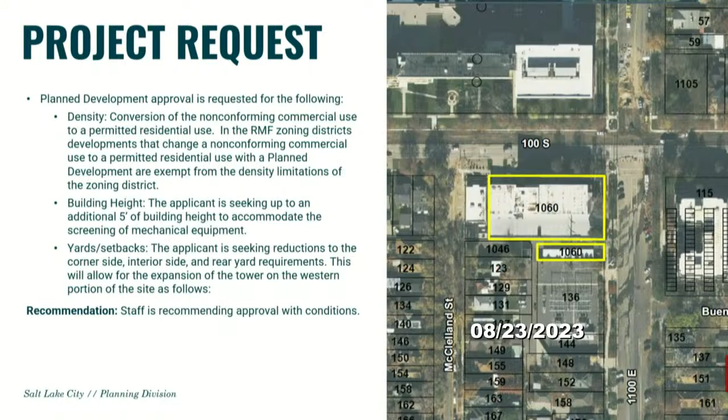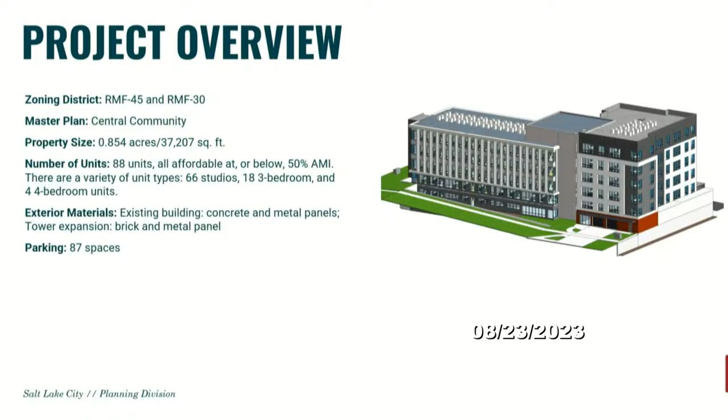The project overview: the property zone is split between the RMF45 and RMF30 zones. It's in the Central Community area, about 0.854 of an acre. There are 88 units, all affordable at or below 50% AMI, with a different variety of unit types - 66 studios, 18 3-bedrooms, and 4 4-bedroom units. The exterior materials for the existing building are concrete and metal panels. The tower expansion would be brick and metal panel, and they're providing 87 parking stalls, which exceeds the minimum required parking.

We'll be looking at the zoning ordinance standards review, so RMF45 zoning, and then the plan development standards. If we look at the existing conditions, you can see on the top left and right the existing medical building. The one on the left gives you a better image of where you'll see the newer portion, because the newer portion of the building is going to be on top of that 2-story and would match the height of the existing tower to the west.

Here's a view from the alley on the east, which will not be impacted through this process - it will continue to exist and be passable. The left picture also gives a good idea when we talk about setbacks, because you can see this parking garage is actually set back like 3.3 inches from the property line, so there's basically no setback currently.

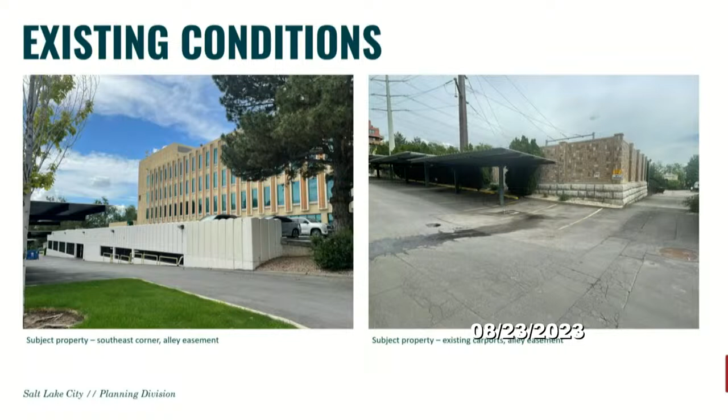These are the existing conditions - this is just a general survey, showing the parking areas and the building itself.

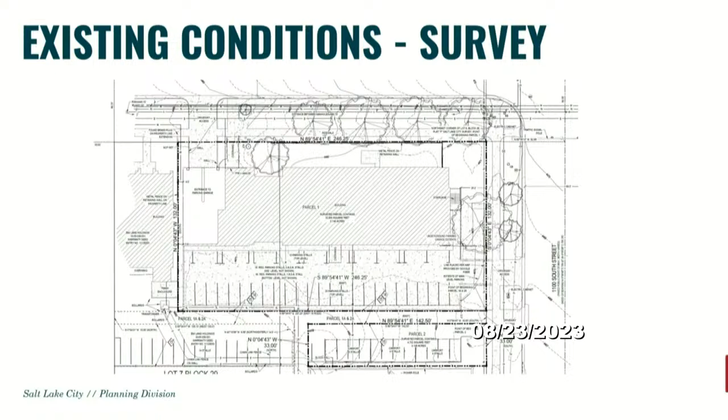If we look at the proposed site plan, you can see the outline in blue is where the new development would be, but only on the western half would you actually see new construction. The rest would just be remodeling and reusing that existing medical office building. Some of the parking structure's top will actually be used for amenity space, with a portion of that residential tower going above as well. The below parking will remain to provide parking for the development.

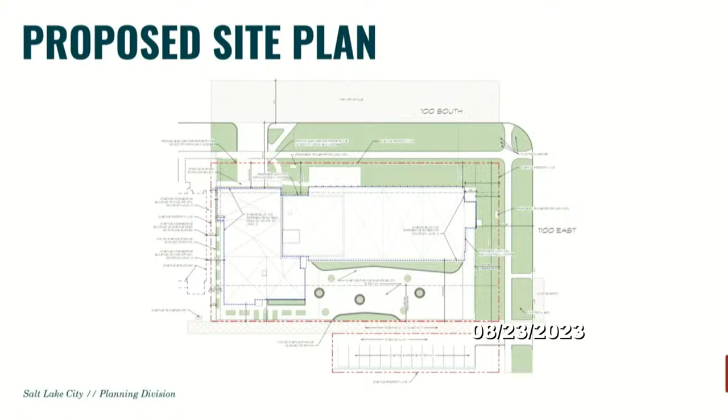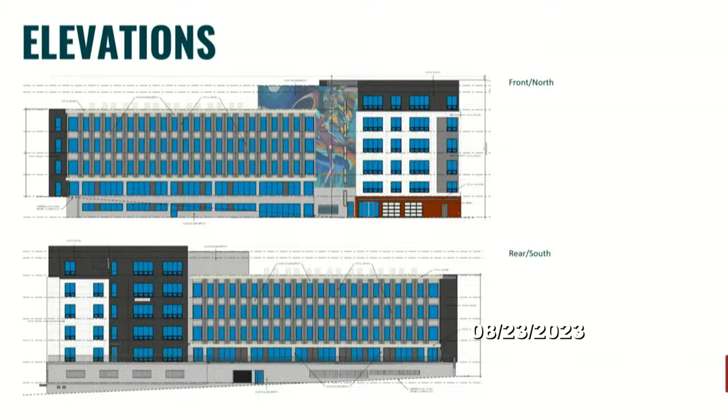I'm going to go through the elevations rather quickly because the applicants are here, and I'll rely on them to talk more about their design. The top one would be the north elevation, fronting on First South. The bottom should show the southern elevation. This shows the two sides, with the east portion being the street-facing side.

So let's go into the modifications, and why we're here tonight.

The Planned Development approval is requested for the following. The first one is density - what we have here is the conversion of a non-conforming commercial use to a permitted residential use. In the RMF zoning district, developments that change a non-conforming commercial use to a permitted residential use are allowed through Planned Development, and by doing that, they become exempt from the density limitations. I'll talk a little more about what would be allowed under RMF soon.

The building height is seeking up to an additional 5 feet of building height, just to accommodate the screening of mechanical equipment. Then yards and setbacks - the applicant is seeking reductions to corner side, interior side, and rear yard requirements. What you'll find is that because this building is all within the actual footprint of the existing building, it doesn't meet them already, and so the newer portions aren't going to meet them either. So again, they recommend approval with conditions.

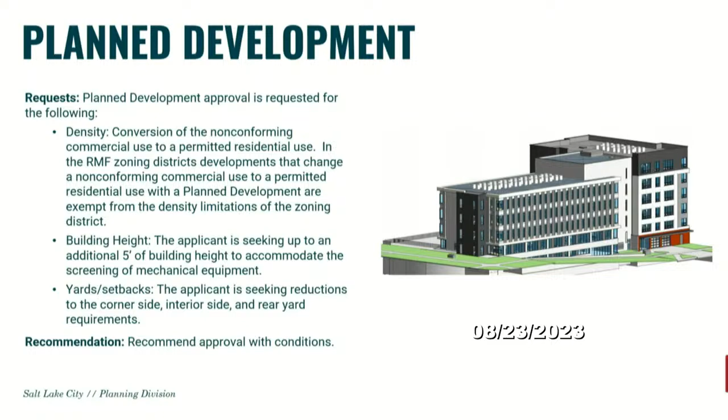Looking at the density, as of right now, because we're looking to propose to convert to residential use, there's 88 units of varying different sizes. 100% of them will be for residents with rents between 25 and 50% AMI, and 10 studio units will actually be affordable at 25% AMI, which, as we've been discussing affordable housing a lot, is pretty difficult to achieve and pretty rare to see.

If this is to remain as RMF 45, if we look at the qualifying provisions for multifamily in this zone, you could have a total of 35 units.

So here we're looking at building height. This is a non-conforming building. It wasn't always on RMF 45, but it was in the 90s, and that made this not complying at over 45 feet. But we can expand as long as we don't go above that height, and that's the green line at the top of the building, showing the max building height was at 69 feet, 7 inches. As we go across there, you can see that is the rooftop height.

The applicants are requesting an additional 5 feet, which is allowed through the Planned Development process. Again, that would be just for a parapet wall to help screen some mechanical equipment. You can also see that because of the grade, the height does vary from 46.5 feet on one side to about 69 feet, 7 inches on the other.

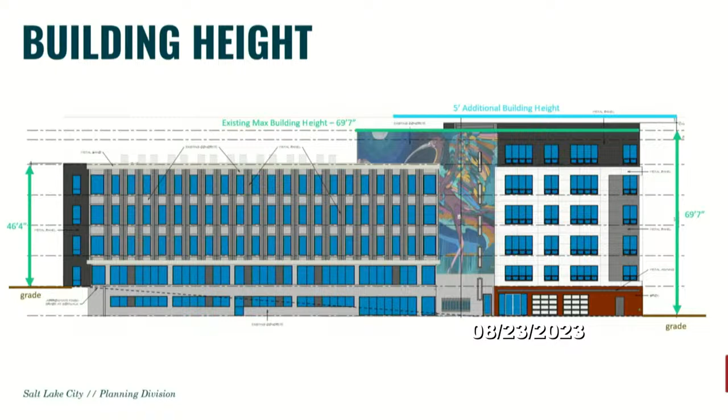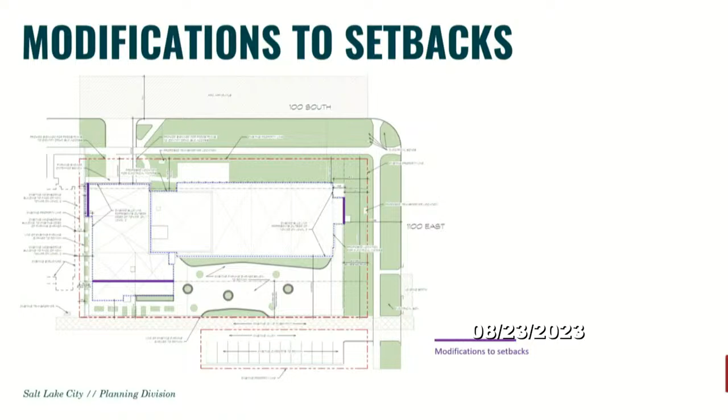If we look at just adopted master plans, staff feels that it is in compliance with adopted master plans, with Plan Salt Lake, Central Community Plan, and Housing SLC. It's providing affordable housing in an area of the city where there are fewer income and rent-restricted units. We're providing studio as well as family-sized units, removing a non-conforming land use, and also meeting Housing SLC metrics, which is seeking to provide affordable and deeply affordable units.

The public process: we sent early notification to property owners within 300 feet. It was posted online in an open house. The Central Community Council discussed the project and provided a letter of support with considerations, which should be in the staff report. Staff has received a number of email comments, and those are included with the staff report, or they were put in your Dropbox for those that came in this afternoon.

Those that commented expressed concern about alley access easement, adequacy of parking, the proposed design, and impact of affordable units. Two expressed support.

So again, our recommendation is for approval. We have 2 conditions that are limited: first, final approval plans shall be delegated to planning staff to ensure compliance with zoning standards and conditions of approval, including off-street loading, signage, lighting, and landscaping. Second, that this is an approval for the specific items discussed and identified in the staff report, and that all other applicable regulations and requirements from other agencies would still apply.

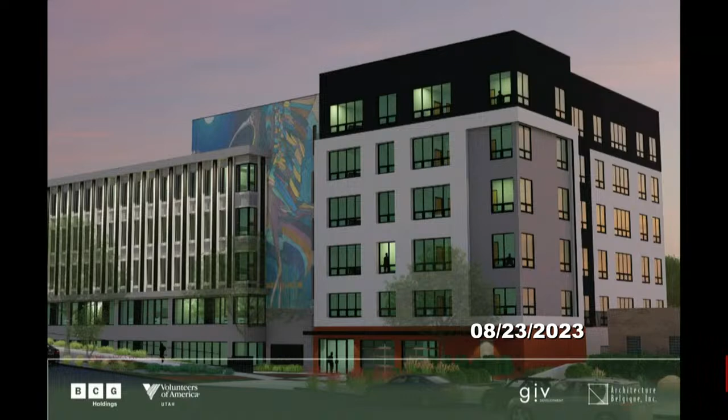We have a couple different views here—this is from the street side, and I think you've seen some of these. I did want to note the mural in front is a placeholder; we haven't decided what it will be, but we want it to be a community asset, so we're working with the community council to decide what it will be and have it reflect the community. Part of our commitment with the Salt Lake RDA funds is to provide public art, so this is our way to do it, making it a community project and a community asset.

Addressing some of the issues that came up in comments: the alleyway—there's always confusion when looking at renderings, but the alleyway is remaining the same. We're considering closing off our entry and exit into the alleyway that leads to our parking garage, and instead having it open onto 100 South, so we're going through that process to see if we can make it happen. In any respect, we're keeping the alley exactly as it is, and people will still have the access they need to get in and out of the various rear drives for the single families nearby.

We do have professional management assigned to this project. Property management is always an issue, and we've had some comments in that regard—we're committed to the community council to make sure any and all issues are addressed promptly. They have my contact information, and we will work with them on their recommendations to make this a successful project all around.

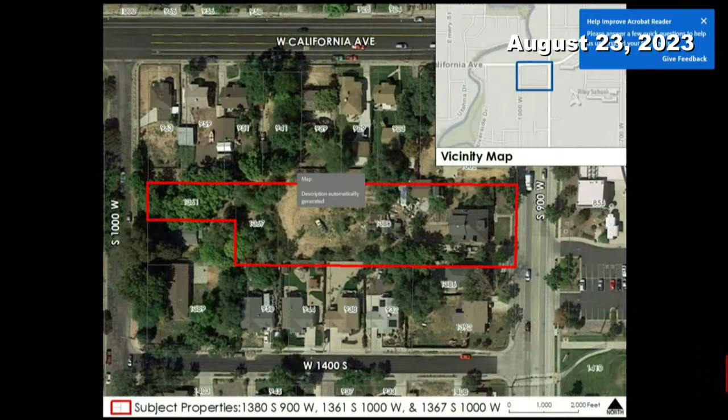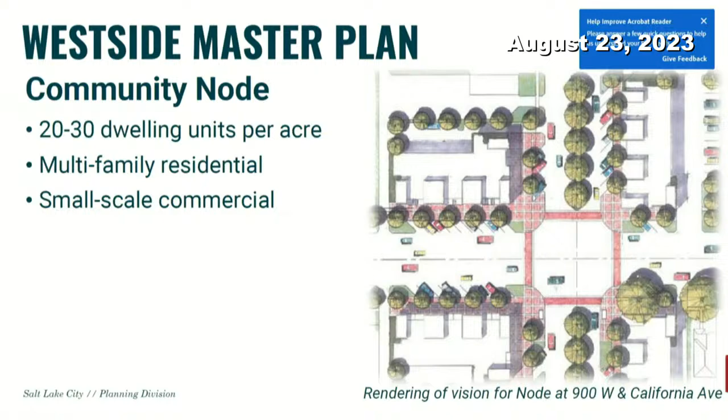So we'll get back to the zoning a bit. Again, the property is shown in red. This block is currently zoned R1-7000 single family residential.

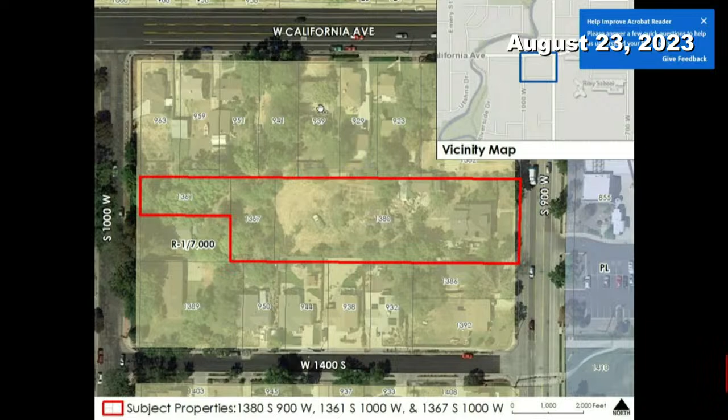So if the property was changed to RMF-30, the difference is that with the R1-7000 zone, it is predominantly single family land uses only.

Whereas the RMF-30 zone allows a lot more residential land use categories like multifamily, duplexes, townhomes, and things like that. The RMF-30 zone also allows a little more building height. The R1-7 zone is limited to 28 feet; RMF-30 allows up to 30 feet, so a couple more feet. Also, the setbacks are smaller, and the required lot size is smaller, so it does allow more density in the RMF-30 zone.

One of the big differences between the single-family zone and the new RMF-30 zone is the design regulations. In single-family zones, we really don't have much in the way of design regulations - you just need a front door and a window along the street frontage. One of the things the city did when the new RMF-30 zone was adopted and developed was pay attention to design and how buildings interact with the street frontage. So the new RMF-30 regulations have a lot more design requirements, such as requiring durable materials, minimum amount of glass, and a limitation on blank walls along the street frontage.

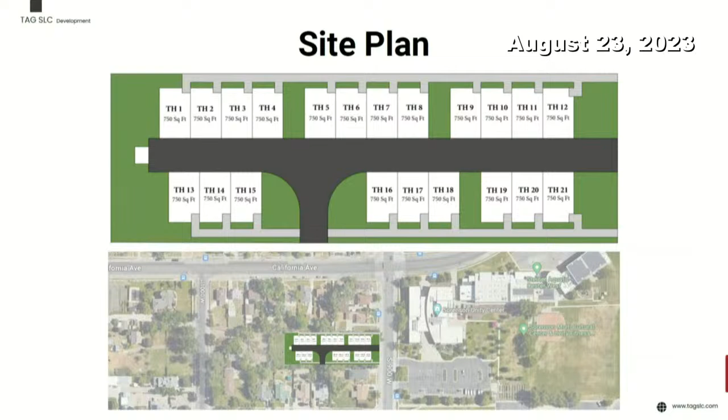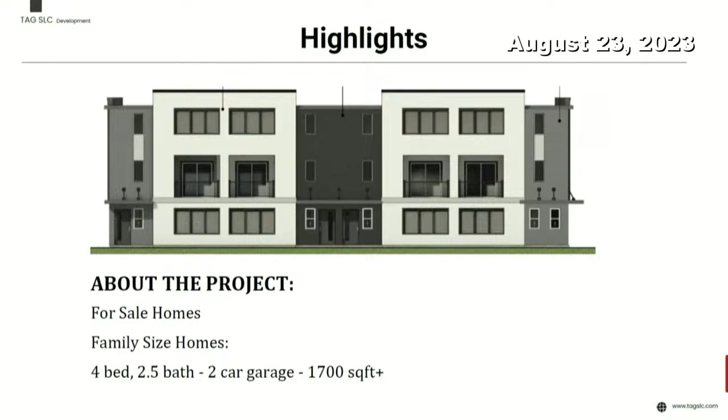Here's our 3 and 4 unit concepts. We're still early in design, but we've been hearing from the community, this body, and City Council that there's a strong desire for family-sized units. So we wanted to deliver a 4-bed, 2.5 bath unit with a 2-car garage that would be for sale, to promote individual home ownership.

This also touches on the other two parcels included in our application. They were included by the original applicant as an access easement. They're currently in construction right now - two single-family homes with a mother-in-law unit. By continuing the rezone, we'll still be able to have this access, and they could be classified as duplexes, making it easier for homeowners and families to finance.

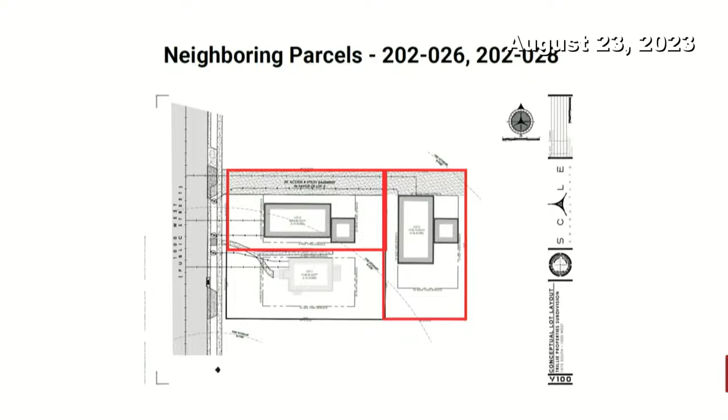That's everything. I have a question, Mr. Chair - can you expand a little more on how you're going to utilize access if they're already being constructed? How would you get access from that side of those properties, since you're not coming at this with a clean slate? Yeah, sorry, I guess I didn't phrase that correctly.

We're using it as a utility access easement, not a drive aisle access. Utility access, thank you.

I'll add to that - when we originally started contemplating the project, we did think we would continue the road all the way from 9th West to 10th West. As we got further into design development, needing to curve up so we could do a double-loaded drive, which is a lot more efficient, it didn't seem best to connect. By stopping it and using this hammerhead, we also freed up quite a bit of green open space toward the rear of the property. Then when we went back to the group we did some consulting for on 10th West for their subdivision, they requested we continue to leave their parcels as part of our application, and attempt to move forward with them as duplexes.

Thank you, Jordan. I have a question for staff, Wayne - just to get it on the record and clarify, because we have a concept before us, and that's great, but any future actual development would end up being a planned development and would still have to come back before the Planning Commission. Correct.

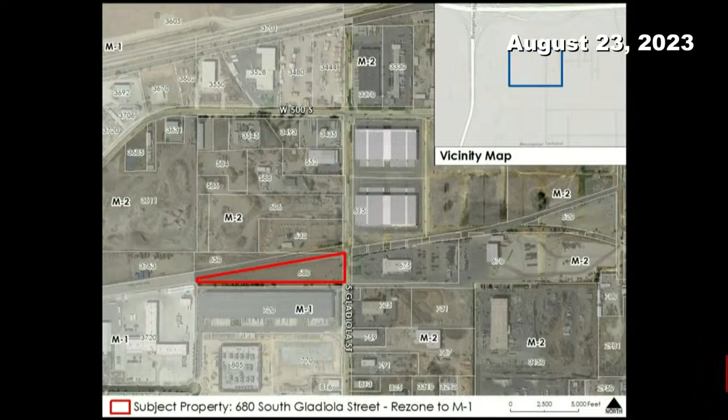Give a little overview of the area here. It's right along a Union Pacific Railroad corridor, just south of I-80 and east of Bangerter Highway. The property is located in the Northwest Quadrant Master Plan, and you can see it's that little red triangle sliver there. It's right along the edge—in the Northwest Community Master Plan it's identified as heavy industrial. So here's a close-up of the area.

In the master plan, the heavy industrial designation talks about promoting infill of underutilized property for manufacturing and industrial uses, supporting the businesses in the area. The master plan doesn't specifically say what zoning district these properties should be. Currently they're zoned heavy manufacturing, but rezoning to M1 light manufacturing, staff believes is still in line with the master plan. The light manufacturing zone still allows manufacturing-type uses and also allows uses that support those manufacturing uses.

Just provide a quick summary of the difference between the M1 and M2 districts. The M2 district allows really heavy industrial uses, and quite often those occur outdoors, whereas the M1 allows industrial uses but with lower impacts, with most things occurring indoors, some outdoors. There are a couple of differences: smaller lot sizes are allowed in the M1 district, lower height in the M1 district, and some smaller setbacks in the M1 because typically they're lower impact uses. As far as the rest of the development standards go, pretty identical.

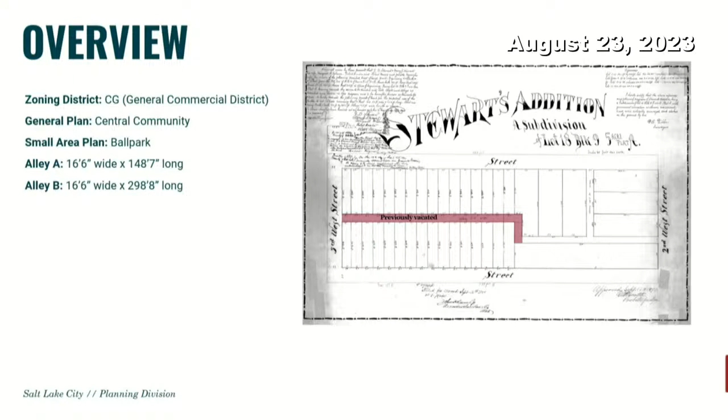Alley A, the north-south alley, is 16.5 feet wide by 148 feet 7 inches long. The remainder of Alley B, the east-west alley, is 16.5 feet wide by 298 feet 8 inches long.

Alley A appears to be paved, but a gate was installed likely at some point after 2019, which blocks public access. The alley is primarily used as a parking area for an adjacent auto repair business. Alley B is gravel and has unobstructed access between 300 West and where it intersects with Alley A. To the west of Alley A, it has also been fenced off and appears to be used as outdoor storage and parking, and the gravel appears to be deteriorating beyond this point. The gate appears to have been added sometime between 2019 and 2021, based on satellite images.

Andrew and Van Buren Avenues are both very narrow streets at approximately 33 feet wide. Currently, only a small portion of Andrew has a sidewalk, while Van Buren does not have one at all. Because 400 West was vacated, Van Buren is a dead-end street, resulting in a low level of connectivity. Most of the surrounding development is heavy commercial or auto-oriented. However, a new multifamily building is being constructed on the other side of Andrew at the corner with 300 West. The applicant is also proposing to redevelop the property surrounding the alleys, which will be discussed in a later slide.

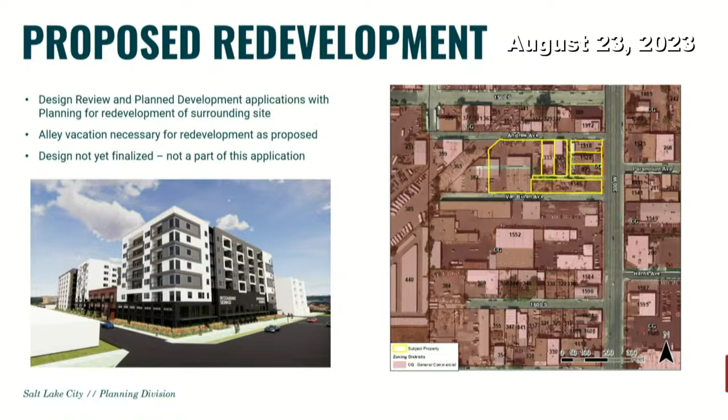In reviewing the application, staff used the standards in Chapter 14.52 of the City Ordinance. These list policy considerations for vacation of alleys, as well as standards to consider when making a recommendation to the Planning Commission. To dive into more depth about the request, first, the applicants are asking to fully vacate Alley A, the north-south alley. Alley A currently helps to break up the block, which is pretty long at about 759 feet from 300 to 400 West. However, it does not provide a connection between Andrew and Van Buren Avenues.

Staff feels that a better treatment for this block could be to vacate Alley A and replace it with a mid-block connection that fully connects Andrew and Van Buren. This could also provide for a placement of the connection that breaks up the block in a more even way than Alley A currently does, hoping to make Van Buren feel more connected to the surrounding streets despite being a dead end. If replaced with a full mid-block connection, vacating Alley A would meet policy consideration C from 14.52.020, urban design. Staff recommends that the Planning Commission forward a positive recommendation to the City Council regarding the vacation of Alley A with these two conditions.

One, a development agreement must be secured, ensuring that a mid-block connection will be created between Andrew and Van Buren Avenues in exchange for vacating the alley. And a public access easement must also be secured, ensuring public access to the private right-of-way.

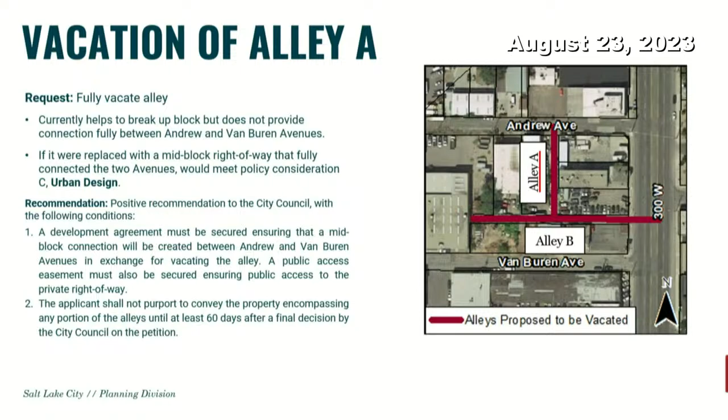The applicants are also requesting to fully vacate Alley B, the east-west alley. Alley B used to be much longer, connecting to 400 West on the west side of the block. However, most of Alley B has already been vacated, starting in 1973 and then again in 1997. It is no longer serving its original purpose and is not providing much additional connectivity to the block. To the west of Alley A, the alley is fenced off and used for outdoor storage and parking. This portion of the alley meets policy consideration A, lack of use.

The entirety of Alley B breaks up the block in an uneven way, creating a rectangular site on its south side that is nearly 300 feet long on the Van Buren side, while only being 56 feet wide on the 300 West side. Vacating the alley would lead to a better use of the block overall, which meets policy consideration C, urban design. Staff recommends that the Planning Commission forward a positive recommendation to the City Council regarding the vacation of Alley B, with one condition, that the applicant shall not purport to convey the property encompassing any portion of the alleys until at least 60 days after final decision by the City Council on the petition.

And it was on the previous slide, but I should also mention that we wanted to apply that condition to Alley A as well.

Vacating the alleys and replacing Alley A with a new mid-block connection generally complies with the applicable adopted plans. The Central Community Plan does not list preserving alleys as a priority in this area, but it does recommend that easements for mid-block connections be obtained where possible. The Ballpark Plan lists a goal of utilizing existing alleys for pedestrian and bicycle connections. However, the existing alley configuration does not provide good connectivity, so replacing them with something that does better meets that goal. Plan Salt Lake echoes the Central Community Plan, recommending increasing connectivity through mid-block connections.

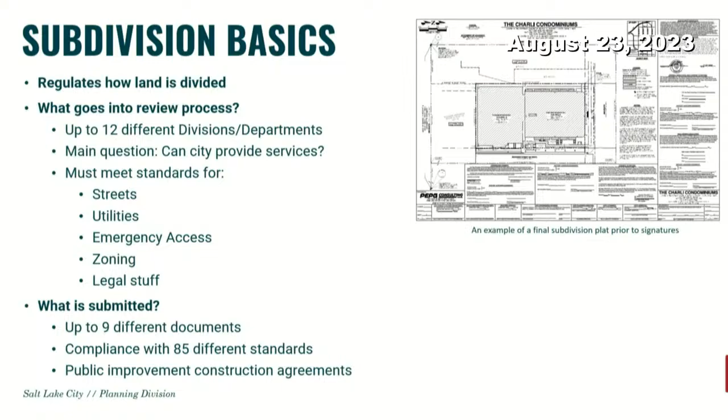I'm just trying to understand the broader context for these subdivisions. Suppose that I decided to buy up a bunch of agricultural land that was unincorporated, not part of the city. Does each county in the state of Utah also have subdivision requirements for unincorporated land?

So the state has subdivision regulations, and unincorporated land at the county level will have certain things. This isn't necessarily dealing with annexations, which is different, but once something's brought into the city, that's another layer, our local subdivision code. So the state doesn't get into the detail we do with some of these things.

Yes, unincorporated counties do have their own subdivision section in their ordinances and land use codes. And they would have to comply with this law as well.

So if I was trying to build on unincorporated land in Wasatch County, Wasatch County's regulations would have to comply with this state law as well? Correct, yes, that's correct.

In this process, they're submitting up to 9 different documents. They've got like 85 different standards. We also look at public improvement drawings, and there's construction agreements. So these are very involved processes that happen before there's ever talk of a building to be put on a piece of land.

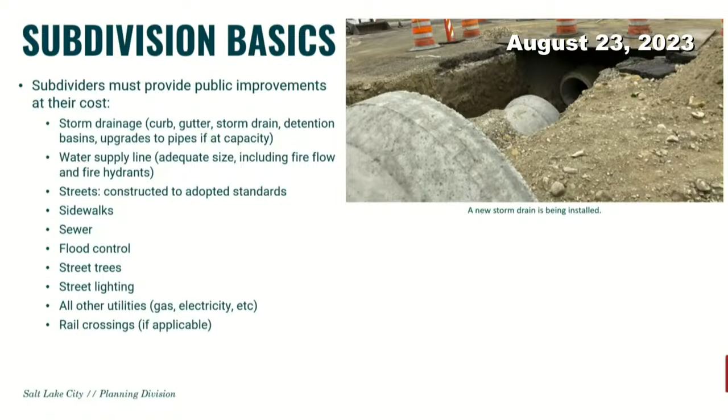Looking at the approval process, most are staff level approvals. The only time they're going to come to the Planning Commission is first if it's part of a planned development, which is a subdivision that maybe doesn't meet the underlying zoning code, so we're looking at utilizing the land in a slightly different configuration or way.

And then again, if there's a public right-of-way that isn't in line with master plans or something like that, or if there's some major community topic brought up by the public during the noticing period that warrants a greater discussion, then it could be brought to you as well. I'll be honest, I don't know if I've seen that happen in my time here or elsewhere, so not too often.

But we do send out noticing, it goes out to surrounding properties. It's a 21-day notice, and they're looking for potential impacts to somebody else's property, maybe with easements, private infrastructure, kind of big ticket items.

So the basic process for subdivisions is we've got a preliminary subdivision process and a final. And the preliminary, we're looking at basic design standards, making sure it can be serviced with water, sewage, other infrastructure, storm drains, things of that nature.

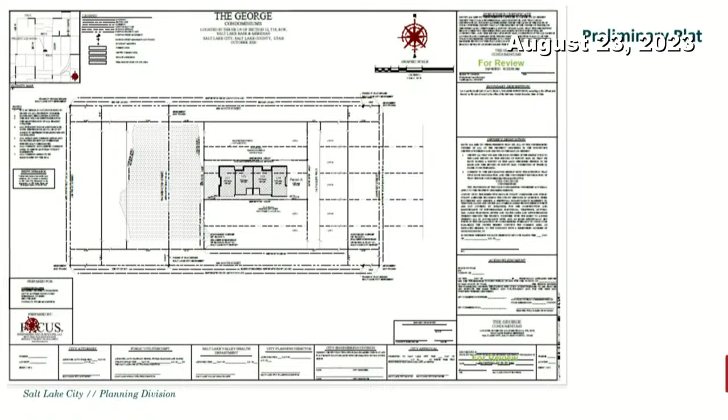Then a final plat is more along these lines, where we're going to have the signature boxes for each of the departments. It's far more technical, establishes all the easements, dedications, and we make sure everything is in place for a final subdivision.

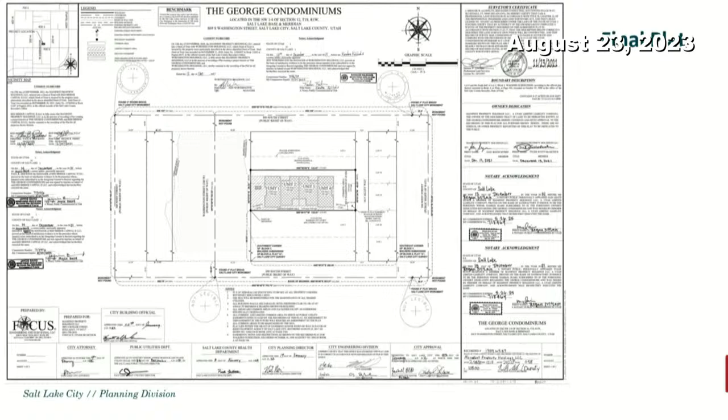Again, this kind of shows the flow of how that works, moving through preliminary. Once we've granted preliminary approval, they'll go ahead and submit public improvement plans and construction agreements, and we start reviewing those internally and getting those things put in place. Then they can submit for the final plat.

We review that - it's a far more technical review. Start collecting the signatures, and they move to recording. That ensures they've met all requirements. There's all the legal requirements for title, owner signatures, each of the reviewing departments, the mayor, city recorder, and county recorder all sign this.

Then, just for your information, there's a handful of other subdivision processes we do: amendments to subdivision plats, condominium conversions - taking perhaps a commercial building and turning it into residential units, or dividing a building into condominiums. We do lot line adjustments between property lines, lot consolidations eliminating lines between them, street dedication plats which don't have any lots involved - they just create new streets or conversion of private streets.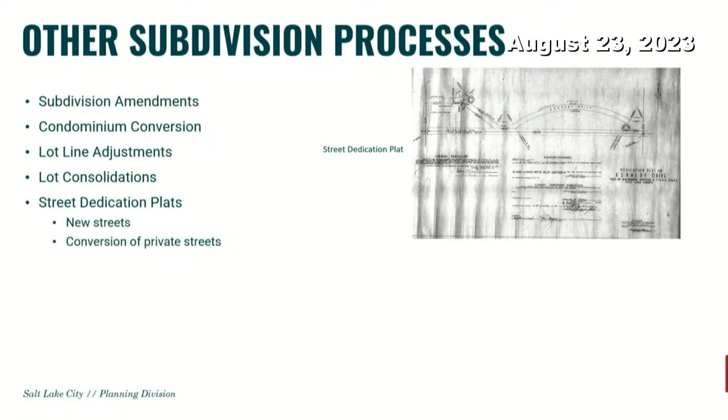Looking at subdivision design standards, we've talked about some of these - they're related to city utilities. I won't get into the specifics unless you're curious, or we can talk about them more next time. About all the water, sewer, stormwater, and a lot of these are done by different departments in the city. Flood control standards, connectivity with sidewalks, streets, and a lot of those are in the master plans, or there's certain dimensions for downtown.

The street design themselves, widths and cross sections, and then we do have protection of natural features. There's a lot of new standards in there for that, just clarifying things - some of that was in the state code, but other things we did to protect streams, rivers, wetlands, wooded areas, wildlife habitats, and things like that.

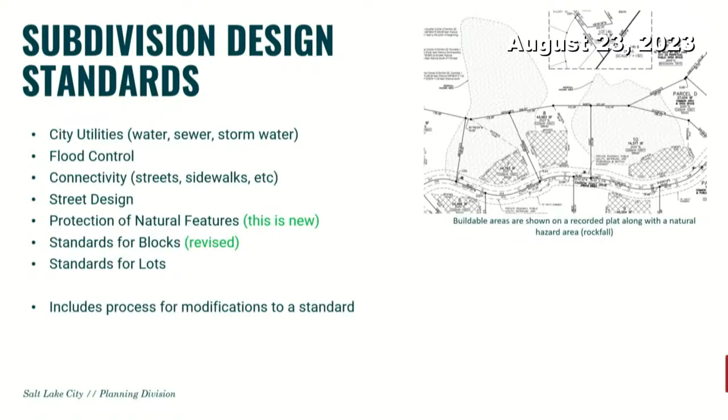And then we have revised the standard for blocks. Some of you might remember we had some dilemmas with block sizes - the standards were geared more towards this side of the city with small residential plots, and not out west with large commercial tracts and manufacturing tracts. So we've corrected all that. Again, it has a standard for lots and includes a process for modifying these standards.

So looking at this, we're currently in the 45-day public input period. That goes until September 22nd. We're on a tight time frame, so we've got a public hearing on this scheduled with this commission October 11th, and then we'll transmit as soon as possible. We need to get this to the city council so we can do a work session and public hearing, and then try to get a decision by January 2024 so we can be in compliance with state code.

If there are specific questions you want to go over, or want to understand certain things, I'd recommend you write them down or notify us so we can be prepared with the information you need, and so we can be ready for the public hearing. We can make sure to include all that information. But that's the end of my presentation. Thank you.

I have something, you want me to write it down or tell you right now? Either way. On natural features, I wonder if that protects water aquifer recharge areas, because we talked about that before and it seems like that would be a good idea.